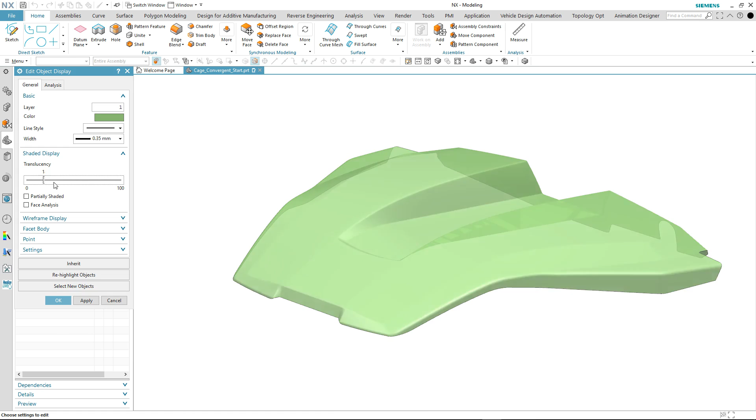In the graphics window you can see a convergent body of a vehicle hood, and we've already started to reconstruct this mesh body using some of the new commands in this release of NX. As you can see, we have a subdivision body followed by some other child features. I'd like to take you through the process of getting to this stage.

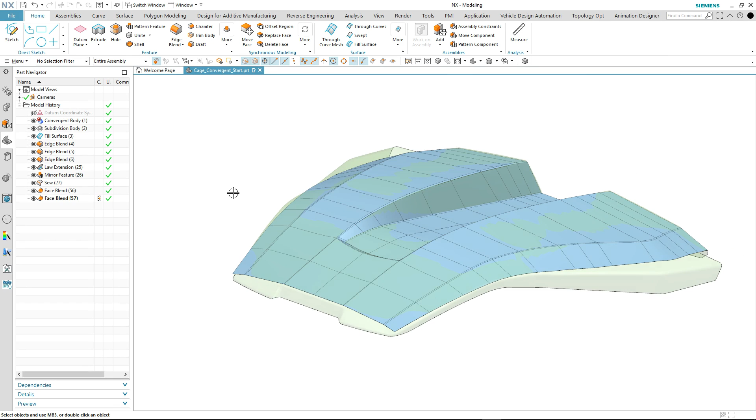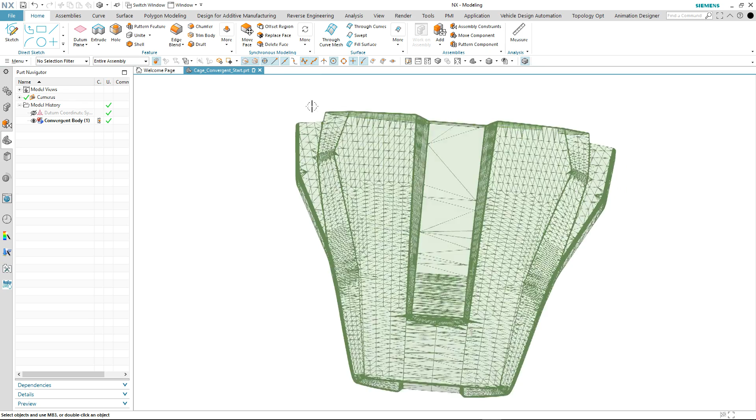So here we have our original convergent body, and for ease of selection during this whole subdivision sheet body creation, I'm going to make the body itself translucent and then show the facet edges. You can see the makeup of this mesh body.

I activate Realize Shape and then select the new command, Draw Cage. It's as easy as this, just to start selecting geometry directly on the mesh body, whether that be a facet vertex, point on face, or point on edge. You can see how quick it is to develop these quad shapes. It's using the previous quad shape as the starting point for the next one. So you can very quickly reconstruct surface geometry directly from referenced scan data.

And the result is a single subdivision body. I can also use any of the other NX Realize Shape commands, such as Transform Cage, to make subtle adjustments to the subdivision body I've just created.

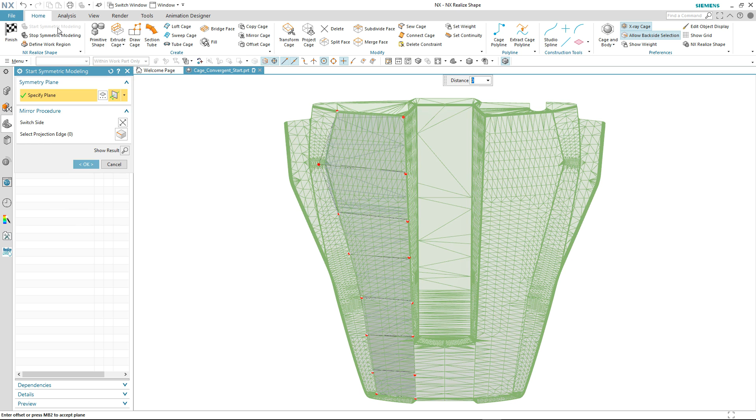Now, as this hood has symmetry, I'm going to use symmetric modeling. Now I have both sides of my design created, although I only have to make modifications to one half for it to affect the other.

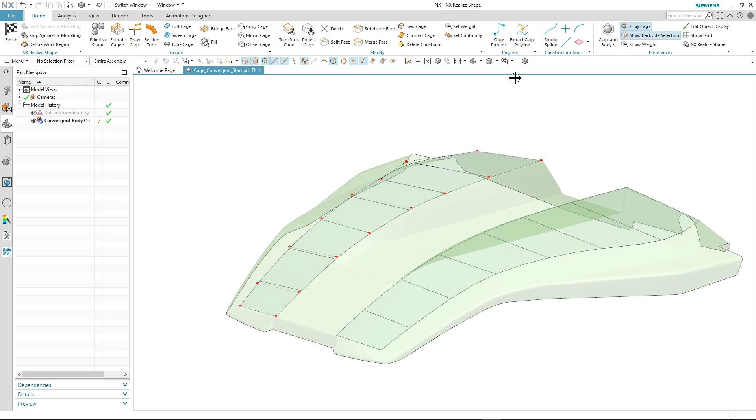Notice if I switch off the facet edges and also the convergent body, that the subdivision sheet bodies follow the shape of my convergent body.

I'll now continue with my design, and I'm going to do this center wall that runs down each side of the model. So I reselect my original cage and then start to continue constructing the geometry.

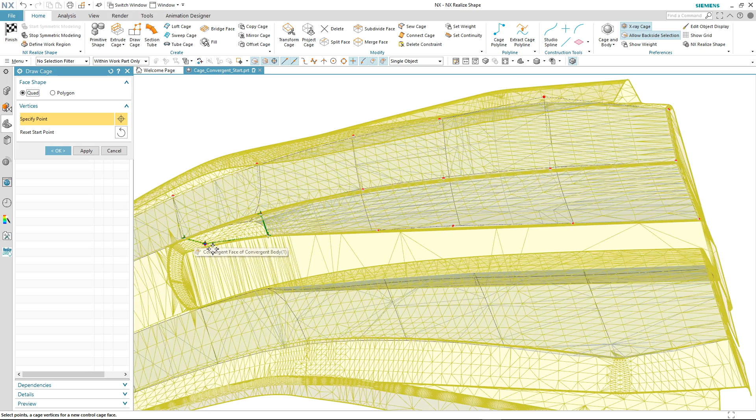As you can see, with symmetrical modeling, both sides of the design are being updated simultaneously. You can really see how quick it is to construct geometry using this technique.

I can continue to further refine the design. In this case, I'm going to set the continuity to match the sharp edge of our original mesh body, and it's as simple as that.

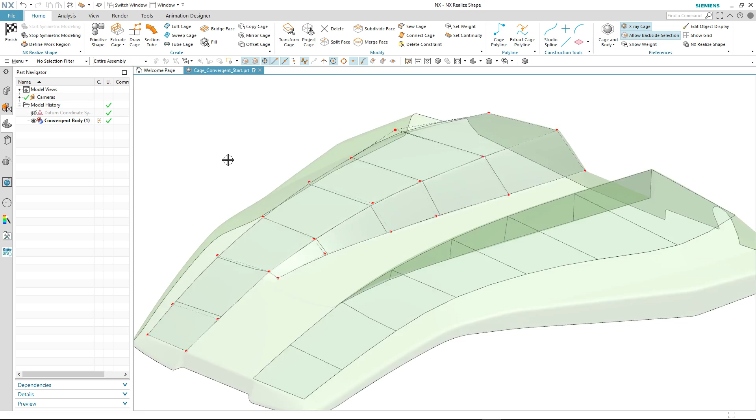I continue to make modifications to the reconstructed surfaces using common NX Realize Shape commands. We'll just modify the cage using a transform, and then again we'll just split that cage up so we can move the edge in the valley a little closer to our original design.

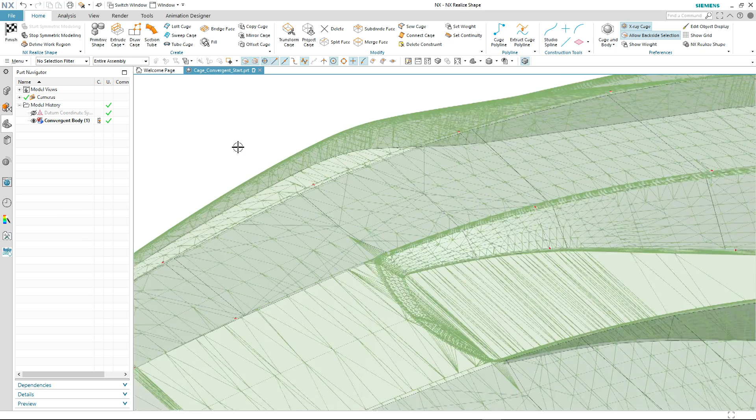So let's take a better look at what we've got so far. We'll just switch off the convergent body and you can see what we've constructed in our design so far.

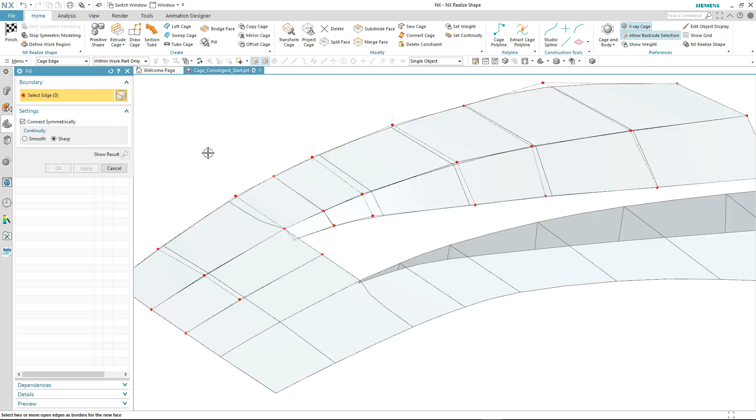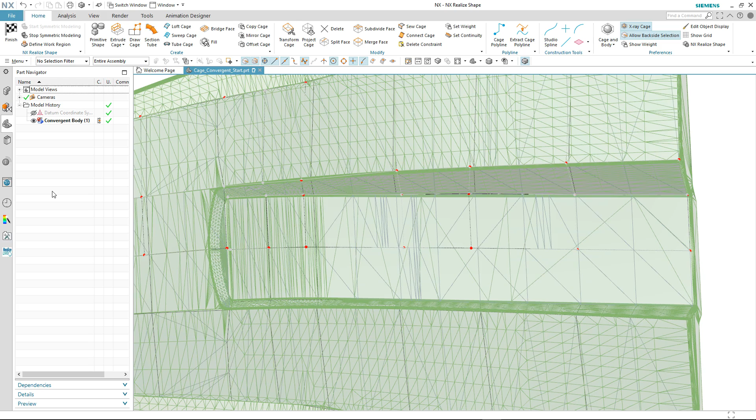We'll continue to add subdivision bodies, this time using a slightly different command, which allows us to fill geometry across the center line. And again, similarly in the valley, very quick and very easy using the tools in Realize Shape, especially with the inclusion of the new Draw Cage command, which allows us to lay subdivision surfaces extremely quickly onto existing geometry, in this case a convergent body.

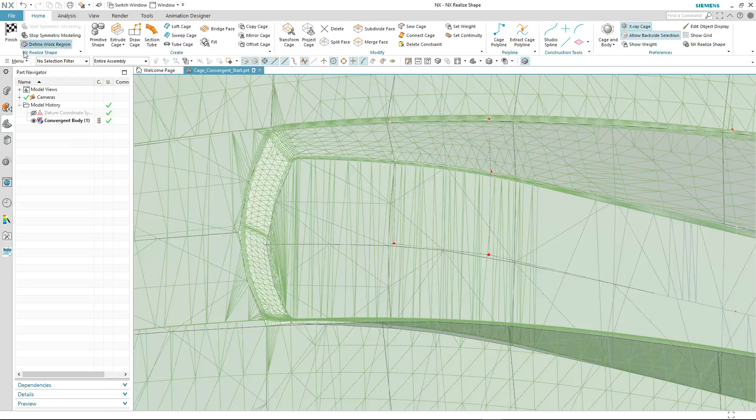I continue to make modifications to the subdivision bodies so that I can create what I need to generate the angled wall between the valley and the front of the hood.

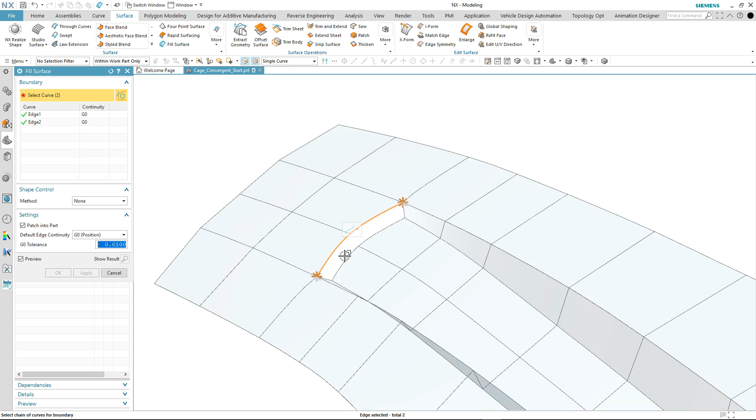So I'm going to isolate the subdivision body, and now I'm going to concentrate on creating that walled face. I'm going to use the fill surface to do this, and I just very quickly select the boundary and the surface is created.

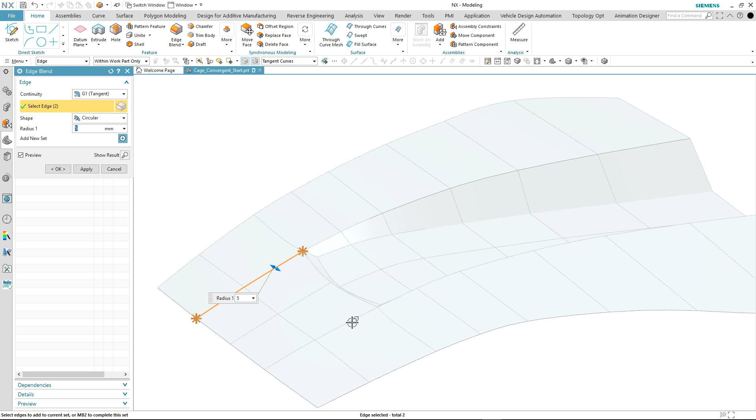You've seen me use a number of different tools and techniques to get to this stage of the design. Just going to finish off this section with adding some of the finer detail, such as the fillets or blends across the model. Again, we're just using standard NX modeling blends to do this. And then we'll run the final two blends around the top of the valley and the base of the valley.

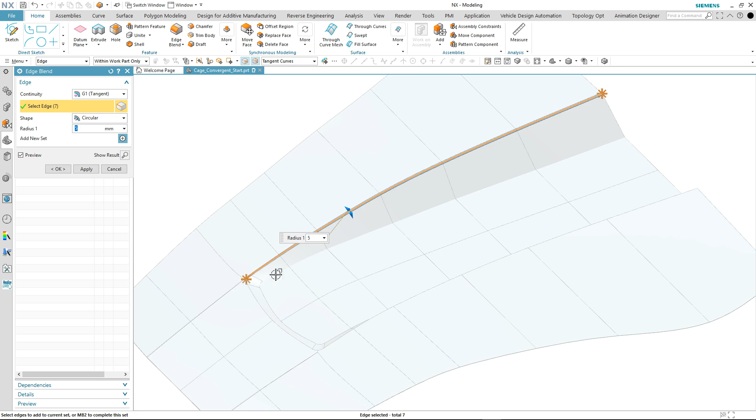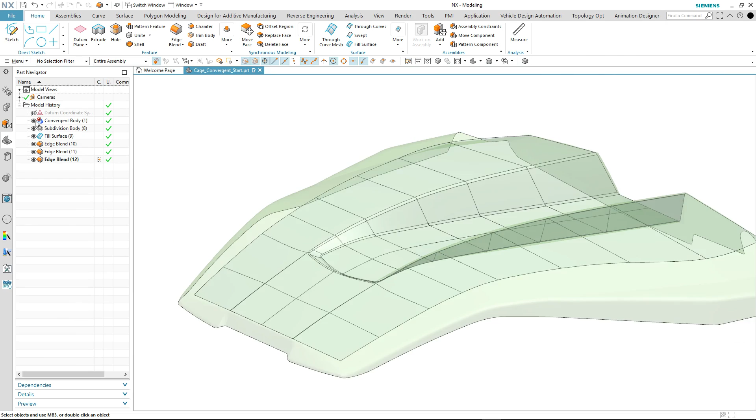And there we have our design. At this stage, you can see how it follows our original convergent body. Obviously, we would need to continue adding more features, but you can see how quickly we were able to get to this stage, utilizing not only traditional modeling techniques, but also the new Draw Cage command.